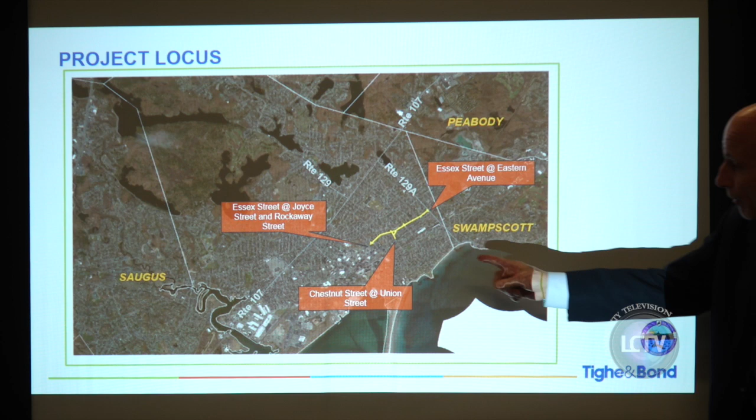But then we continue again to the northeast, and the project goes all the way to Eastern Avenue. So it's a pretty significant project, from Rockaway, Joyce, all the way to Eastern Avenue, and then of course, right in the middle, right where we are right here in this area of Chestnut, Mason, Fayette, Union. Bill, want to go to the next slide?

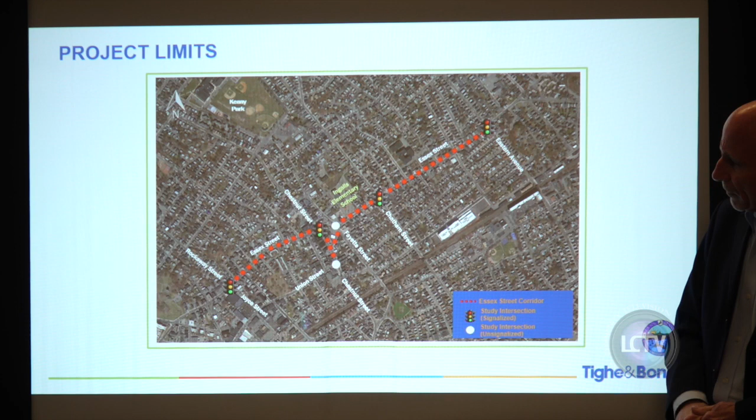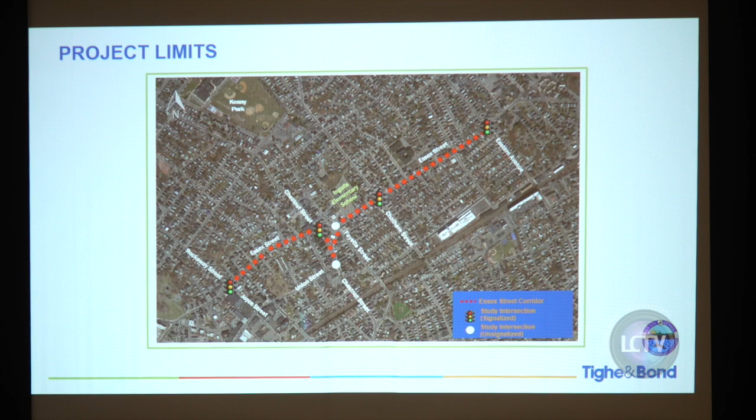So again, you can see on this map a little bit clearer as to where the project extends. You can also see where those high crash intersections were: Rockaway and Joyce, Chestnut, Chatham, and then of course Eastern Ave. And so all of those intersections would be improved. Projects like this, obviously it's important to address safety first. Safety is always first. And then we're going to talk about some other things.

So purpose and need, you see that first bullet right there, safety improvements. On any project, safety is always paramount. So this project will address safety issues, particularly at those intersections that we talked about, but also pedestrian safety, bicycle safety, and other deficiencies along the roadway. Intersection and corridor operational deficiencies.

A lot of these intersections don't operate. We know that if we're sitting there in traffic. Why am I sitting in this long queue of traffic? So the project will address those things as well, with all new equipment and geometry and state-of-the-art traffic signals. Just met someone from ISD tonight who is going to be very interested in that.

General roadway and sidewalk deterioration. How many think the sidewalks are really good out there? Yeah, nobody, right? Same thing with the roadway. So new concrete sidewalks, granite curbing, all of those things are features of the project. And of course, when you're addressing roadway and sidewalks, you have to think about drainage. Okay, so how is the drainage working? So we have to address drainage deficiencies, new catch basins, new drain lines, things of that nature.

And then of course, ADA compliance. We want to make sure that all users can use the sidewalks and the roadway in a safe manner. So the project will include handicap accessibility ramps and things of that nature. And then also this bus route along Essex Street. So it's also enhancements for transit, whether they're new bus stops or transit signal priority, things like that to allow the transit to work better along the roadway.

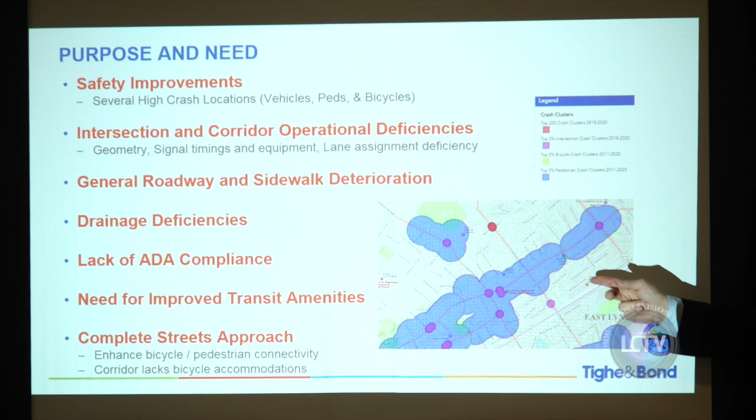MassDOT collects all kinds of accident data, and these intersections, they call them HSIP locations, Highway Safety Improvement Program locations, meaning that these are all high crash clusters. They're either pedestrian crash clusters, vehicle crash clusters, or bicycle crash clusters. And you can see that pretty much the entire corridor is in an HSIP location, right? It's a high crash area. Bill, next one.

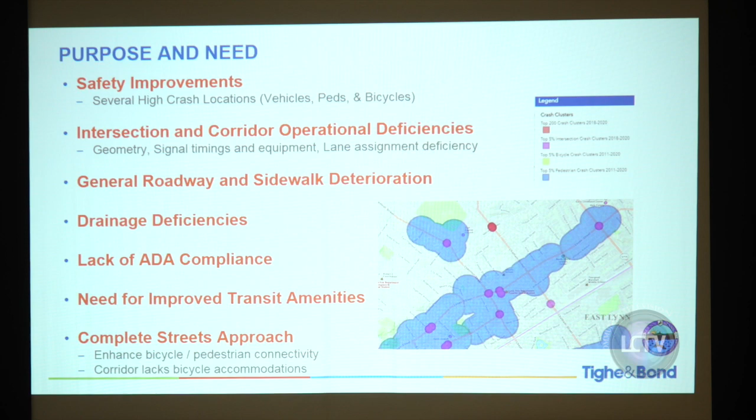Are you going here? Just with me. Yeah, go for it.

Thanks, Chris. So just to expand upon what Richard said, there's a number of deficiencies throughout the corridor that we're looking to address throughout this project. Richard mentioned lack of ADA compliant ramps. That was, and I'll show you some examples in a minute.

Wheelchair ramps, crossings, slopes on sidewalks, making it accessible for all users. That's what we're looking to address in this project. Outdated pedestrian and signal equipment. The signal equipment, whether it be for traffic operations, making it more efficient, or pedestrian crossings at the crosswalks, pedestrian countdown timers, for example, the walk, no walk signals, we're making that equipment upgrade in this project.

Pavement markings that are non-compliant or non-standard. Pavement markings are helpful in demarcating traffic zones, whether it be travel lanes, shoulders, turning lanes, that have faded over the years. That's what we're looking to upgrade. Lack of turning lanes, we'll talk about in a minute, like traffic operations. If you're looking to take a left, for example.

Just slow down. Oh yeah, sorry.

Looking to take a left, for example, and you're waiting behind somebody to take a left, whether you want to cut around them to the right, or you're looking to proceed. We're looking to upgrade the traffic pavement markings to help demarcate the traffic zones and help efficiency in traffic operations.

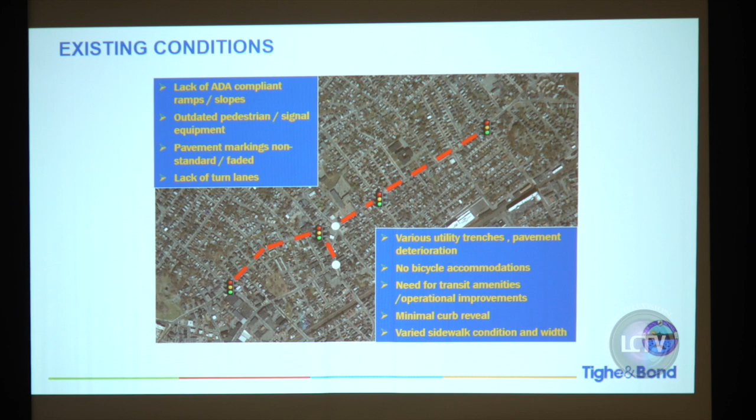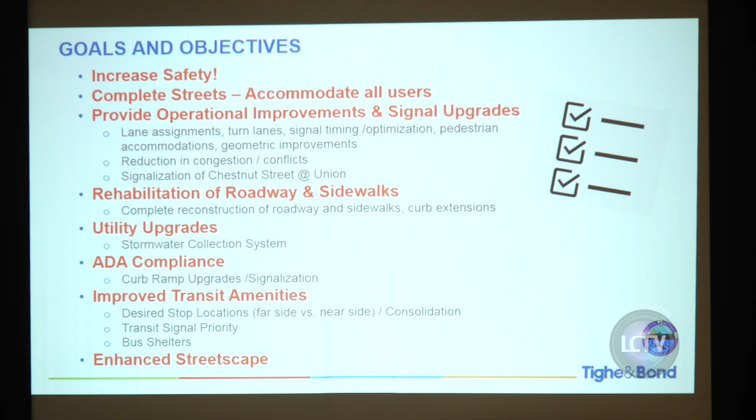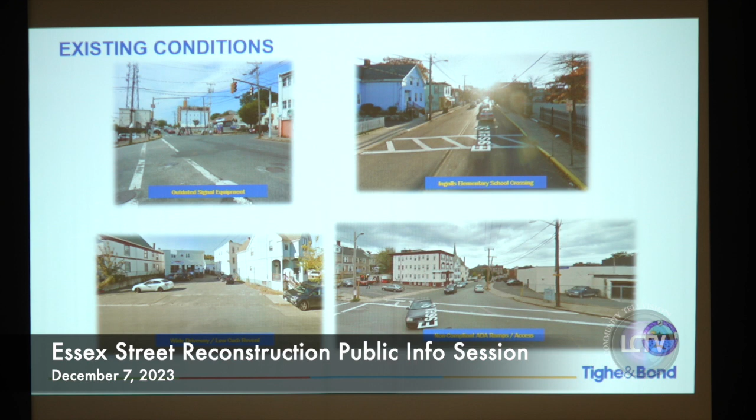Before you carry on, Bill, if you could go back to that. You just got a lot of information about the existing conditions of the roadway, what we see as deficiencies and challenges that make it a less safe road to travel, whether you're driving or walking. But I'm curious, is there anything we've missed? We've certainly got pavement in bad shape, sidewalks in rough shape throughout. Anything else we need to keep in mind as we work into the design phase? We got a comment here.

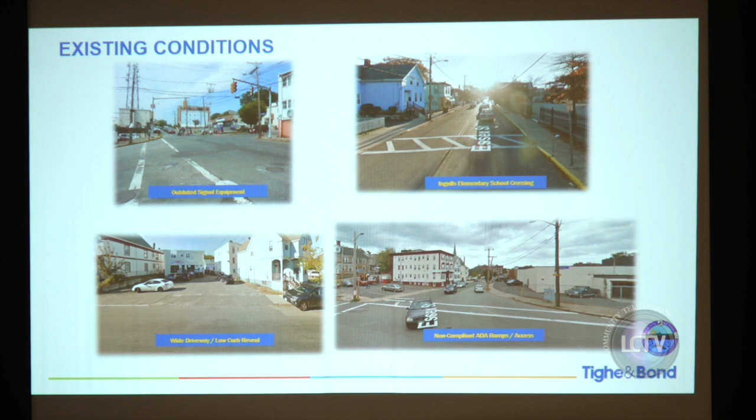Perhaps, is lighting being addressed, like street lights, where there are areas of darkness at night, or any beautification? Greenery, trees, anything like that? Yeah. So just to repeat the question for everybody here: does the design process consider street lighting, and other streetscape elements like street trees? Does that cover your question?

So the short answer to that is yes. This is going to be looking at the corridor from the backside of the sidewalk to the backside of the sidewalk on the other side, and considering all of the street furniture that is a part of that.

Lighting is certainly a safety component of that. We are limited in the kinds of lighting we might be able to install. For instance, we won't be able to implement historic street lighting, the shorter sort of architectural lighting. That's not a part of this, but we'll look at lighting more generally.

Okay. Question back here, yeah? Just a question on parking. We generally look in the winter with the snow. The parking sometimes on both sides of the street gets very tight, causing more traffic and everything else. Yes, but the question was, are we looking at on-street parking as part of the design consideration? The whole section will be.

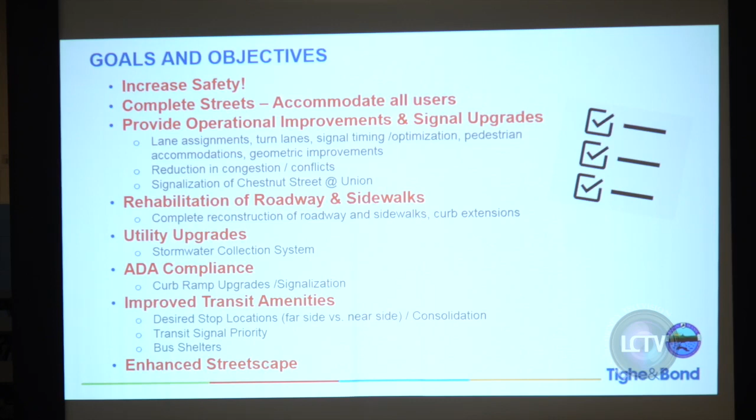And I think we've talked about this quite a bit already, so I'm not going to linger on this too long. We'll throw it up here. But as Rich had indicated, one of the number one, or if not the number one objective here, is to improve safety across the board for all users. Again, that complete street idea, and making sure that we're accommodating all users at all levels of ability. So that's a baseline philosophy that goes into the design process that both the city but also MassDOT will be very much involved with.

Rehabilitation of the roadways and sidewalks, just rebuilding them and making them nicer and cleaner. So that's an important, not an insignificant piece of this. We talked a little bit about some of the broader benefits. There's stormwater improvements that can be implemented along with the reconstruction project. We will work with Lynn Water and Sewer to make sure any water line upgrades that need to happen are done in advance of this project. And also working with utilities to implement upgrades. So there's co-benefits, additional benefits that come out of this work.

We talked about ADA compliance and making it safer for folks with disabilities. Transit we talked about. And the last one, enhanced streetscape. I know this comment came up a little bit earlier. We're absolutely going to be looking at how we can make the street a more aesthetically pleasing space, more pleasing for pedestrians and human beings to move through, and trying to get everything we possibly can out of a relatively narrow roadway. And that in some ways can also support small businesses along the corridor, making the space out in front of their business a little bit nicer, more accommodating and accessible to the community.

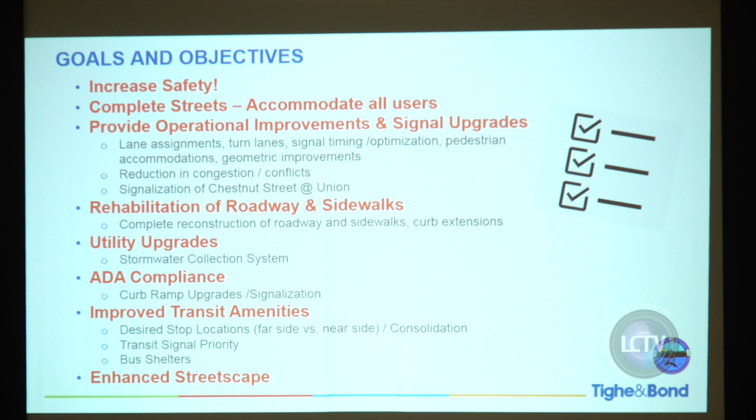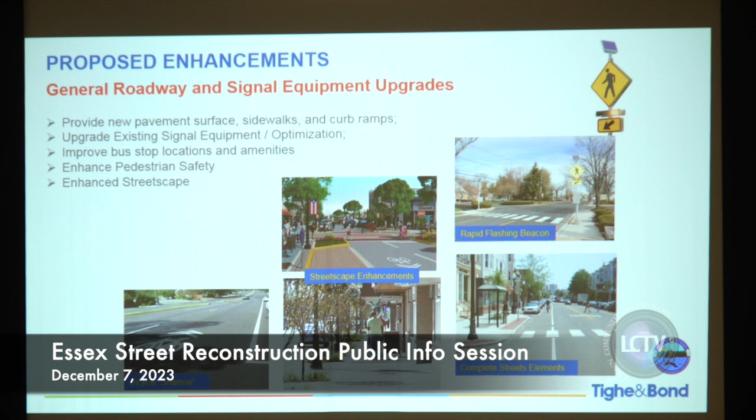We're trying to achieve all this stuff with this project. So that's our objective as we go forward in the design process. We've talked a lot about this. I don't know if there's anything you guys want to hit, but these are examples of the kinds of improvements we're going to be designing with the community into the project.

Yeah, thanks, Aaron. So, just to reinforce what Aaron has said, this is a complete reconstruction of this entire corridor from the back of sidewalk on one side of the project to the back of sidewalk on the other side of the project. So there's a number of elements that we're looking to incorporate into the project.

Aaron mentioned pavement reconstruction. This is a complete reconstruction of the pavement structure, not just, like you may have heard, a mill and overlay. This is a complete reconstruction of the pavement down to the gravel, structural reinforcement, new sidewalks, new curbing, upgrading of all the signal equipment with advanced signal technology, improved bus stop locations and accommodations, pedestrian safety, and enhanced streetscape where we can.

So these things shown on the slide are basically like the tools in the toolbox that we're going to look at. We are completely at the concept level at this point, looking to implement what we can, evaluate what we can before we get into the actual design. So things we'll accommodate are bicycle accommodations, for example. You may have heard bike lanes, shared use paths. All these things are on the table for this project. So we're looking to evaluate that as we go through this early concept development phase.

Streetscape enhancements. Some examples of what we may accommodate and incorporate into this project. High visibility crosswalks, for example, making the crosswalks more visible, making them more safe. Curb extensions, bringing that curb out into the roadway that will shorten the crossing distances for pedestrians. Streetscape, whether it be lighting, street trees, making it more inviting. Again, all elements that we're looking to incorporate into the design.

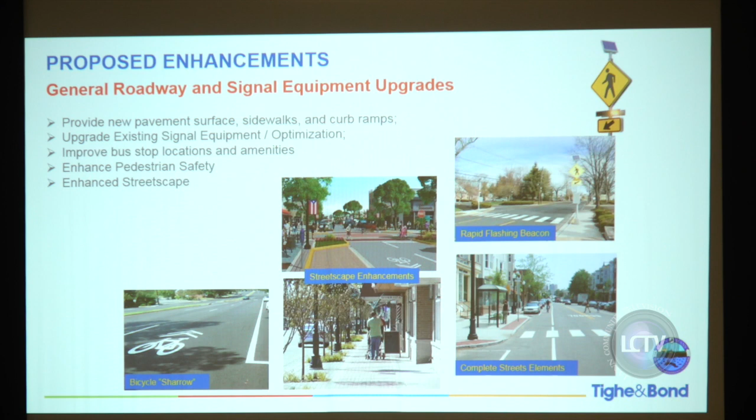We have 10.5-foot travel lanes, that's the vehicle allocation space. We have a 4-foot space on each side that will allow a space for bicyclists. A lot of bicyclists may choose to use the sidewalks or the roadway. Some people may be intimidated by using the roadway. It is a narrow corridor. It is intimidating to use the roadway for bicyclists. So we are looking to provide a space on either side of the roadway for bicyclists if they choose to use the roadway. We also look for parking lanes on either side of the roadway. We recognize that there are residences as well as businesses that utilize the roadway for parking. So we're looking to accommodate that as well.

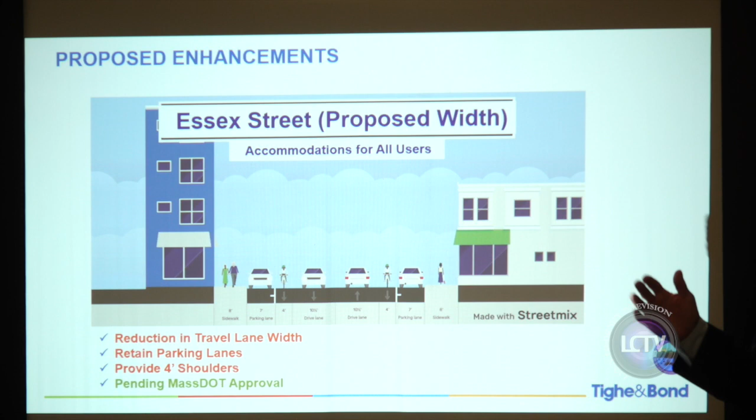So we know that it's pretty tight. And as Aaron mentioned, we have limited right-of-way. Some sections, maybe between Joyce and Chestnut, Essex Street widens out a little bit. But when you get down by Charlie's and the Ingalls School right here, that curb is right on top of you. So it's really trying to balance all of this, and that's why it's going to be a challenge for the engineers to try to figure it all out.

Aaron, it's Rich. I have a question about this proposed width. Is this explicitly being conceptualized just for Essex Street, or will this also be applied to Joyce, Union Street, the other parts of this corridor that the project extends to? So the project extends down Chestnut to Union, so it's just that segment from Essex Street to Union Street, just those short segments. The project really doesn't go up Joyce Street or up Rockaway, we just say that it's part of the intersection. Do we have to look at those things even though it's only a short segment? MassDOT will require us to look at those things as well.

Did you have a question, Councilor? No. Oh, right. So, like you mentioned Charlie's, for example, which one of those lanes do you drop when you get there? You can't even drive by there now with none of this. So, unless you widen it, which is impossible. So, what gives?

Which one gives? So I think, if I could, this is a very simplified example of what the desired street section is. The street width is variable from Eastern Ave all the way up to Joyce. There are parts where this will be very easy to meet. There are segments where we won't be able to provide everything in the street section, like the area you're talking about. So there may be an area where an on-street parking space may need to be removed because there's just enough space for the travel lanes, one side of parking, and the sidewalk. Part of that design process is going to look at each street segment, each block, and figure out what can we fit, where can we fit it, and how do we make safe transitions across the entire corridor.

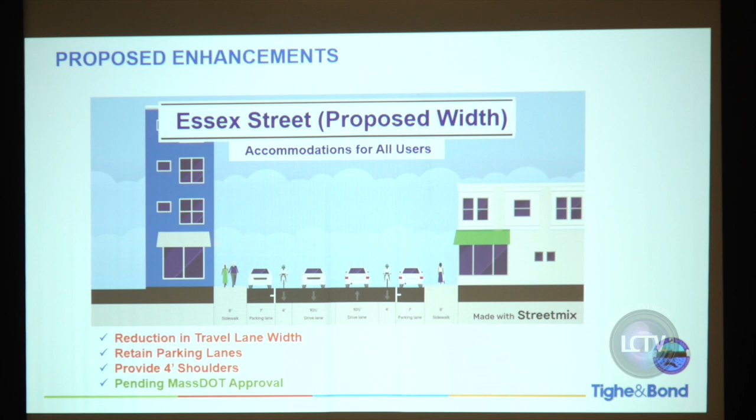This is the starting point, this sets a reference point for the entire corridor. As we move into design, those detailed areas are going to have to be worked out. For sure. In that scenario, you're not gonna tell a bike that you have to stop and find another way, so it's gonna be two pockets out there. You know what I mean? I just see that being a real issue.

As we keep mentioning, it's a very tight corridor, so unfortunately we can't make more space. So I think that's why we're here to really listen, because we mentioned left turn lanes. That's great, but you can't necessarily fit them where we have parking. So the improved operations from left turn lanes, the parking, the bike accommodations, and even sidewalk width are all competing. So that's kind of why we're here.

We really want to listen to see what the priority is. That one up there was to try to preserve as much parking as possible. Trying to get that through MassDOT, because they like wider bike lanes, is going to be really tough. So we're trying to get something that's going to work the best for the people who use the corridor the most.

The other thing too is this is just an illustration. This is not a one-size-fits-all kind of thing, but just a basic illustration, because we know Essex Street, the width varies. It's different down by Joyce and Rockaway. It's different by Charlie's out in front of the school, which is why we talked about having that turnout for the buses, right? And then it changes again as you're approaching Eastern Ave. So it's different all over the place. This is just an example of some of the things that we're going to be looking at.

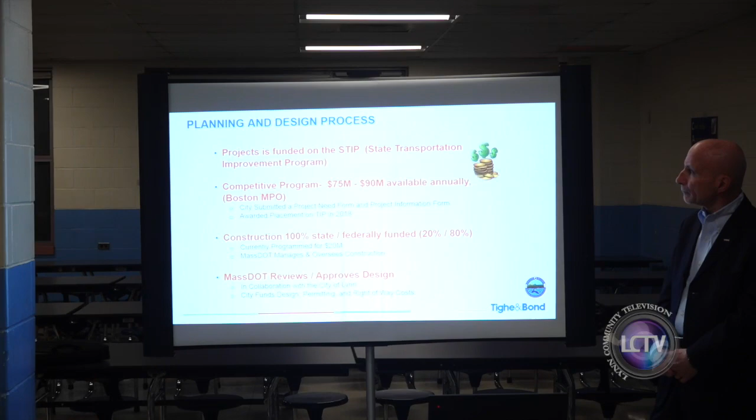Maybe worth going to the process. Again, we hit this a little bit already, and Rich can probably describe the funding. It's a $20 million project, funded through a combination of state and federal dollars programmed at the regional level. We're part of the Boston Metropolitan Planning Organization region. They have a certain amount of money every year to program for transportation projects across the region.

So we've been able to get this onto what's called the State Transportation Improvement Program. It's essentially a 5-year capital plan that identifies the roadway projects that are underway, and some transit projects. This project is programmed for 2026. That means construction is likely to start in 2026. For the whole length of it, construction would be multiple years, but it would at least start in 2026.

For what it's worth, 80% of the funding is from federal funding, 20% is through the state. The city's committed to this project by funding the design and engineering. We hire the consultant to design the project for the city under those guidelines. And as we've talked about already, there's a very extensive design review process with this, primarily the state.

But as we're working through this, we've identified an engagement strategy where we want the community to help us kind of design this as we go along. Obviously tonight, as we've said and you've seen, there's really no design that's gone forward. We're mostly in the fact-finding stage, sort of developing the studies to support and inform that design. But that will be at least an 18-month to 2-year process to do so.

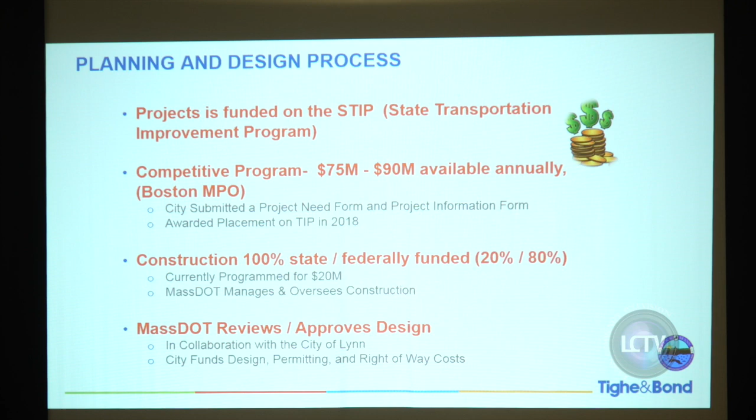If you mind going to the next one. Want me to go through this one?

Again, concept, because before we get to the preliminary design phase submission to MassDOT, we want to have concurrence with the community, at least on the concept, right? Do we like this? Is this working for us, right? And then we would make this 25% design submission to MassDOT. Now, they call it 25% design. It's really the preliminary design phase. It goes to MassDOT and the city for review.

Now, when it goes to MassDOT, it's not one person looking at it. It goes into Boston at their headquarters. Their right-of-way section looks at it, the environmental section looks at it, the complete streets section looks at it, the highway design section looks at it, the landscape section looks at it, the traffic section looks at it. You can see where I'm going with this. It goes to everybody, and they all look at it. And if that's not enough, it then goes to MassDOT's district office in Arlington. And all of those same reviews happen at the district office. So it's a very, very extensive review process that MassDOT goes through.

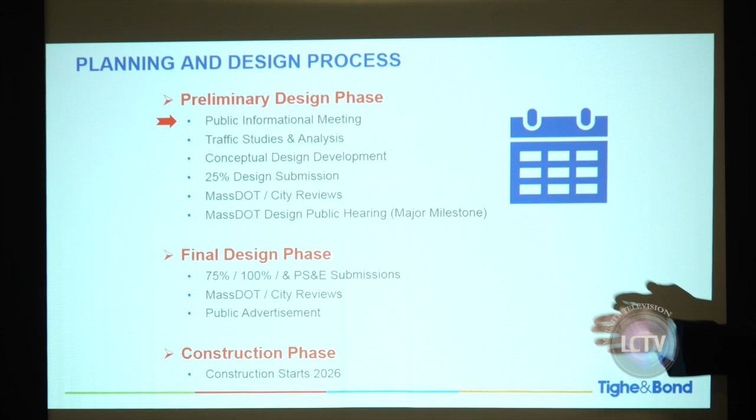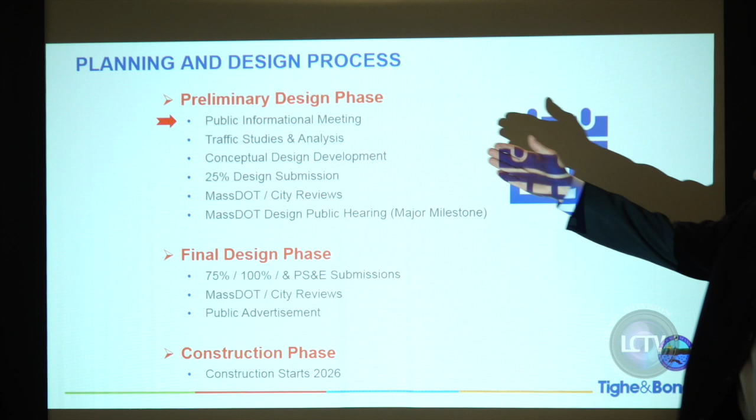Now, Councilor Field had talked about right-of-way. During the 25% design, we are required to identify affected properties that might need temporary easements and things like that. But that happens during here. It's in a preliminary stage. The final right-of-way really doesn't start happening until we get into the later stages of the design, because then we know exactly what we're going to need. And when we talk about temporary easements, for example, and I know we probably don't want to go too deep with this, but just because it was brought up, we'll mention it.

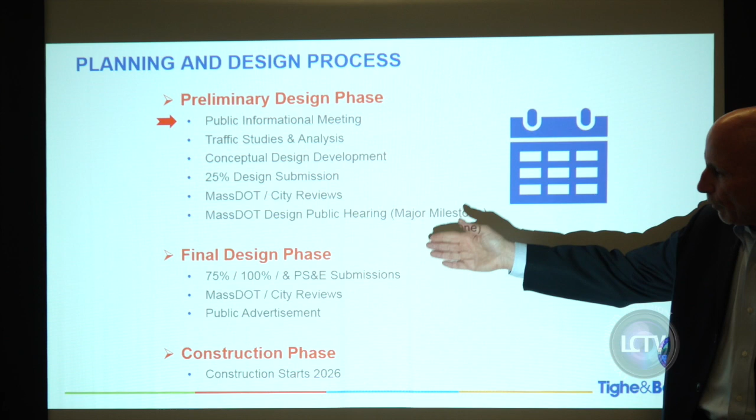If the contractor is putting in a new sidewalk, and the back of the sidewalk is right on the property line, if that contractor has to step on that person's property to pound the form in to build the sidewalk, Federal Highway requires that we get an easement from that property owner. So we've had projects where, Mount Auburn Street was like 400 easements because Federal Highway requires that. So once we get to the final design phases, we really know what those impacts might be, if at all.

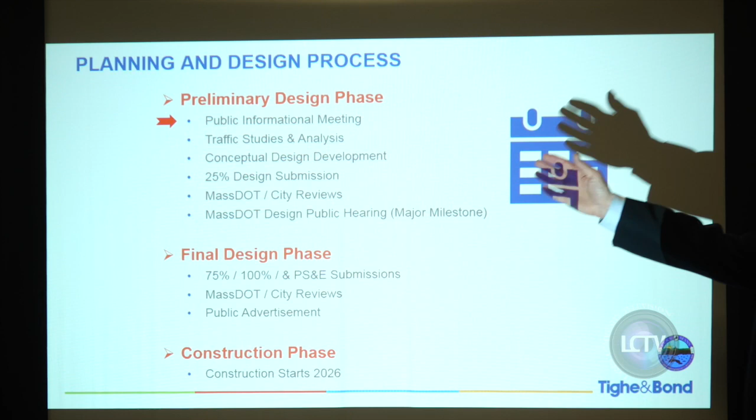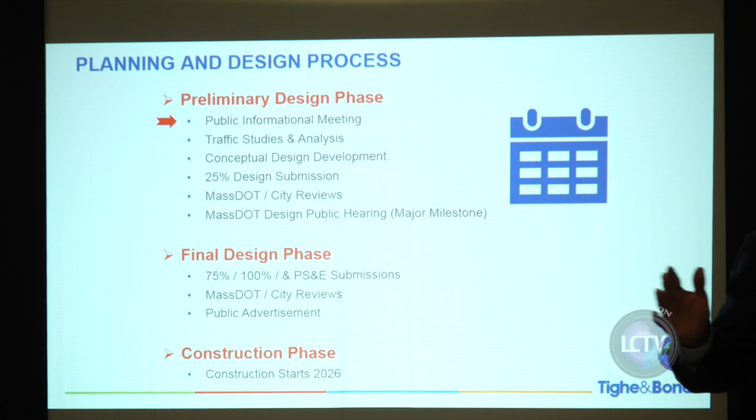Once we get through PS&E, the project goes out for advertisement. MassDOT advertises the project for construction. Once the design is done, the city has pretty much done their part. Now it goes to MassDOT. MassDOT puts it out to bid, staffs it with their own engineers, and administers the construction. It becomes a MassDOT project at that point. As Aaron mentioned, it's on the '26 TIP. It's a federal fiscal year, so October 1st of '25 through September 30th of '26 is when the project could be advertised. MassDOT doesn't like to advertise things in the last quarter, so it's likely the project would be out to bid and a contractor selected sometime in early 2026. Anything I missed? No, not really.

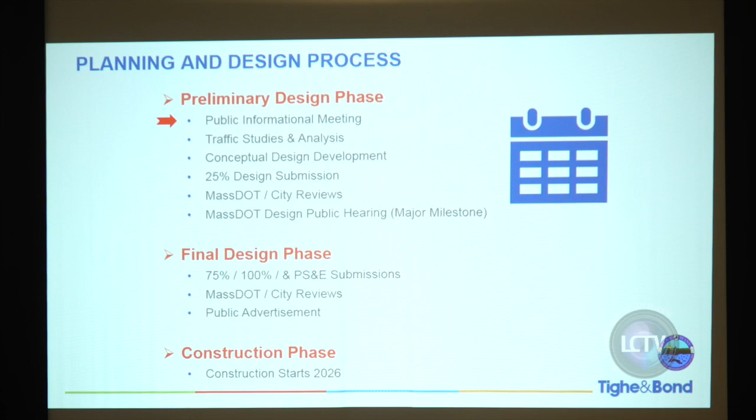I don't know if we have the next screen, Bill. No, let's go back if you could just for a second. I just wanted to highlight the touch points that we're planning into this process to engage with the community and give you a feel of what we're going to be talking about at that stage. That's where we're at right now with the red arrow. We're planning to have another public meeting and engagement before the 25% design submission to share these more detailed designs and work through the street blocks that you have concerns about with safety or where the bus stop is, what have you.

But it's going to be more of an interactive opportunity to sit down and ask specific questions about the design and offer comments that we can build into what is submitted to the state. We're looking at having both a public meeting and 2 open houses, one during the day and one during the night, so we have some flexibility for those who are able to make a specific time. And we also want to make these presentations and an opportunity for comment available on the project webpage. So that's going to be one opportunity to talk about design, and that's going to be a very important stage.

I think that's an area where a lot of the community is going to want to learn more about the detailed design elements and comment back to the design team and the city. Are we going in the right direction? So just keep that in mind. We're targeting an end of February, early March timeframe for those meetings. We'll have those solidified soon, but just keep that in mind. Yes, Councilor.